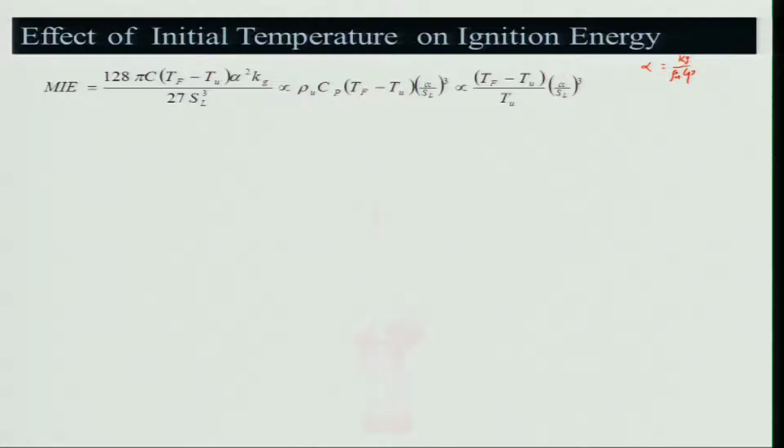So therefore, alpha by SL cubed is more important. Alpha, if you look at what alpha is, it is basically K or Kg divided by rho u Cp. Temperature also comes into picture here. So if you look at SL, it is also a function of temperature, so it will be more towards this quantity.

Stoichiometric, it will be minimum, and as you go towards the lean mixture, ignition energy requirement will be higher because losses will be higher, and burning velocity is lower. The more correct statement would be that burning velocity is lower in the lean and rich mixtures as you go from stoichiometric, and therefore ignition energy requirement will be higher.

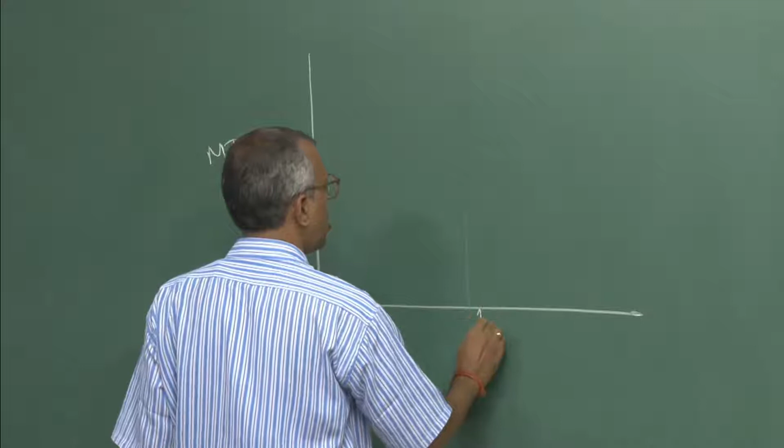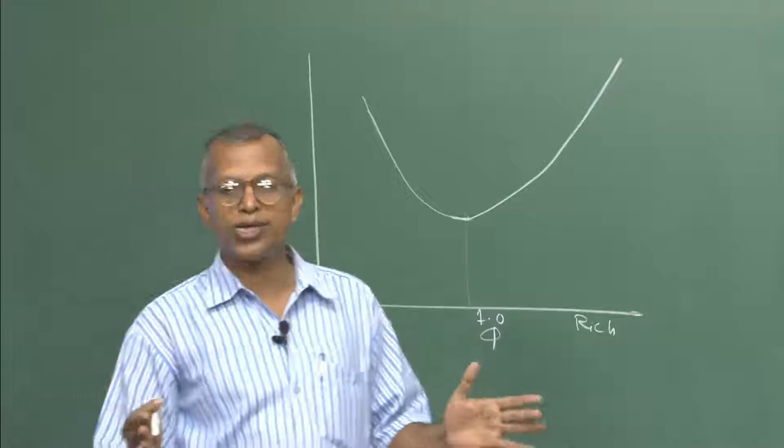That means, if I look at ignition energy versus equivalence ratio for a particular fuel air mixture and system, this will be the minimum ignition energy, around 1, with the lean side meaning fuel lean, and the rich side. This is the minimum, and it goes on increasing depending on how close it is towards the limit mixtures, the lean limit and rich limit.

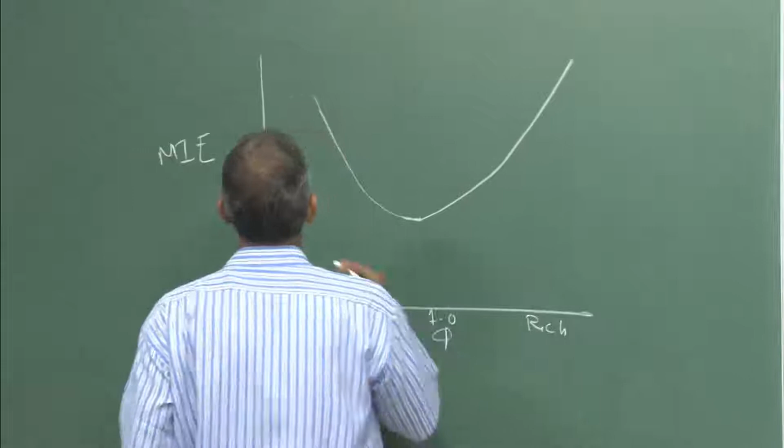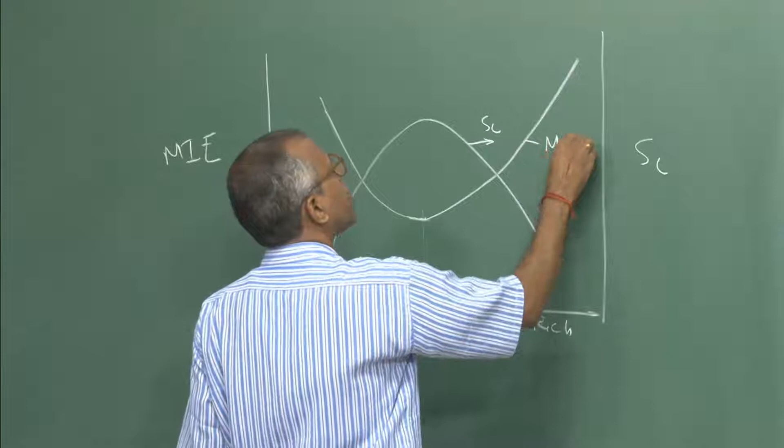Because if you look at this, it can be related to the burning velocity. If I plot SL over here, this is SL and this is MIE. So you should keep this in mind, but here I am looking at the inlet temperature kind of things.

What you could see is that for N heptane, I have given some initial temperatures in the next column: 289, 373 and 444. If you look at ignition energy for 289 it is 14.5, for 373 it is 6.7, and for 444 Kelvin it is 3.2 — that is N heptane, as opposed to isoheptane. For N pentane, I have given data at 298, 373, 444 with values 7.8, 4.2, 2.3, also decreasing with increase in temperature, and so also propane air is also decreasing.

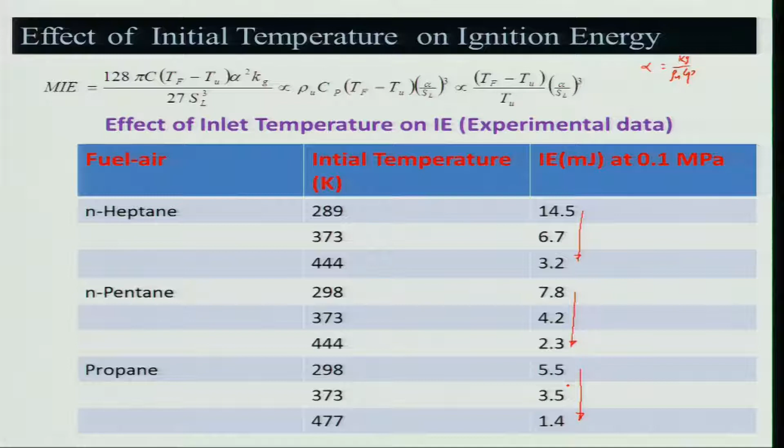Apart from this, can you observe any other thing in this table data? I have talked about with the increase in temperature it is decreasing because SL will be increasing, right. So the ignition energy will be decreasing, it is expected from this relationship. Or if you do not want to feel comfortable with burning velocity, you can say reactivity will go on, so that you need less amount of ignition energy, right.

But apart from that, can you observe something from this table and tell me? This quality is very essential. Can anybody tell me? Longer chain carbons have more... octane number is less for n-heptane. One can talk about octane number, but other things one can talk about is that there are several bonds that have to be broken. You need to give more amount of energy in a very simple way.

So this is what I am saying, when we are looking at it, observation power is very, very important, not only in science, but for other fields as well. This is something which we are not getting nowadays, which is a concern for most of the educationists, right.

So now we will be looking at another concept which is very important, that is flame stabilization. In other words, how to stabilize a flame in a combustor, and that is one of the greatest challenges for a combustion engineer, to contain the flame, like we contain the anger, right.

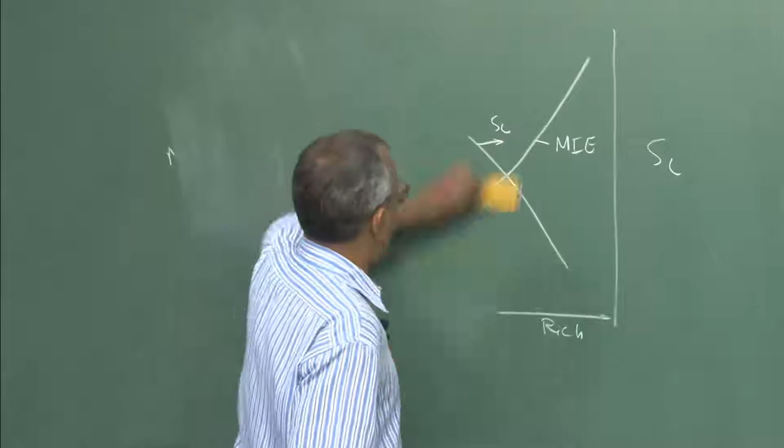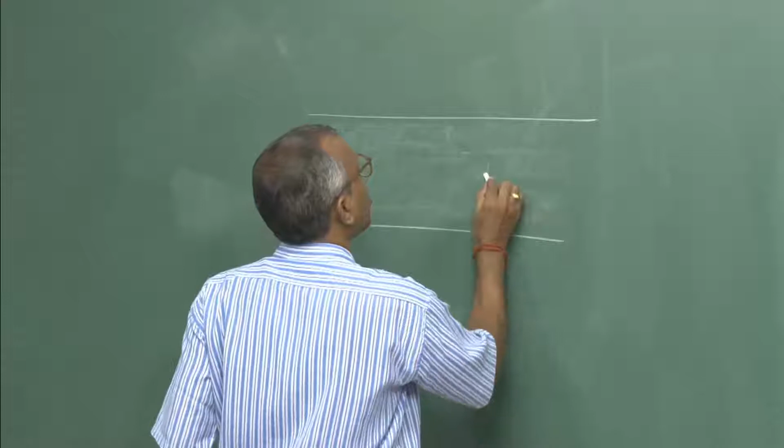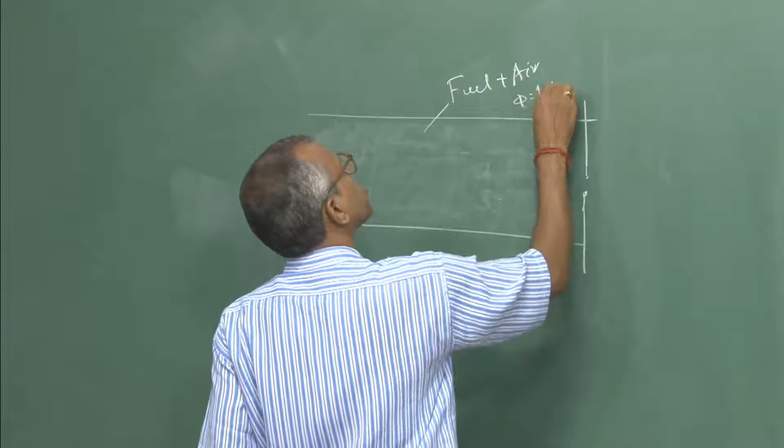For example, if I take this fuel air mixture in a tube, these are fuel air mixture which is mixed well, fuel plus air mixture, and I am igniting here. Keep in mind that this is at phi equal to 1, just for the sake of it, and I will say CH4 air system. Phi is equal to 1, fuel air mixtures are being mixed, I ignite it.

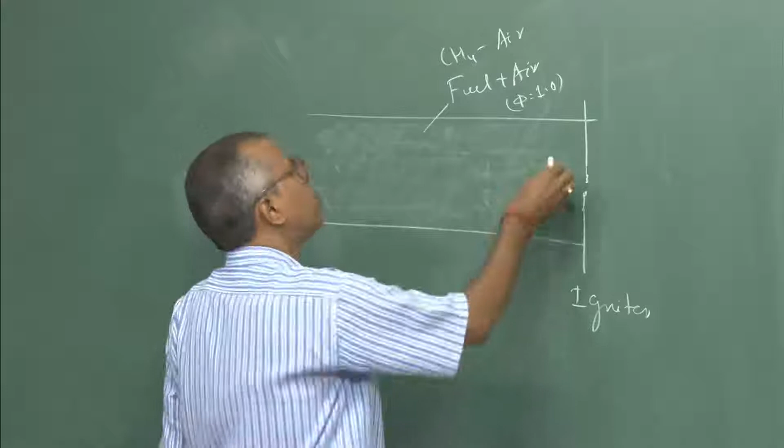That means I am giving some ignition energy. What will happen? The flame definitely will be moving towards this, as long as the fuel air mixture is there, it will go on moving. Of course it will not move beyond that, because there is no fuel air mixture, only air will be there, maybe something might have diffused, but that is not good enough.

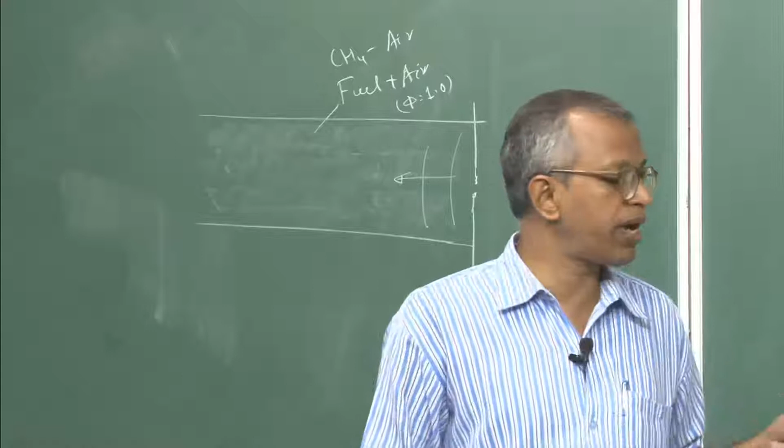Now I want to contain this flame, this is a propagating flame, if it keeps propagating, I will be in deep trouble, but I want to make it stationary. So how will I do that?

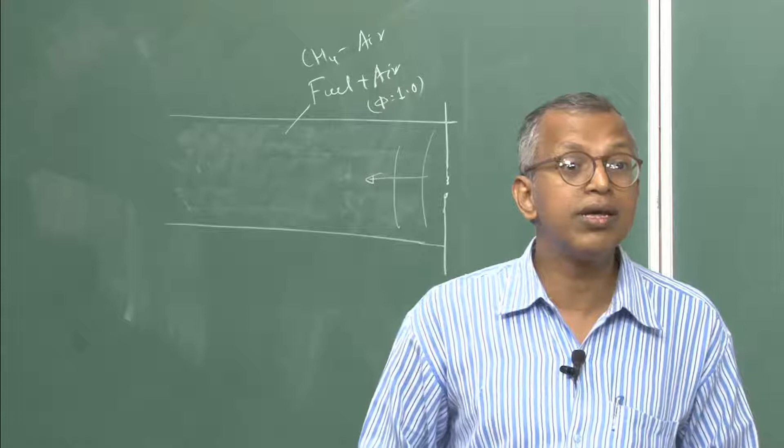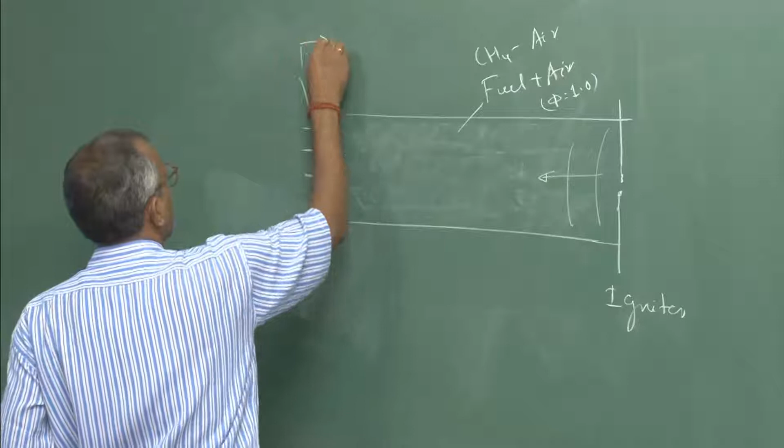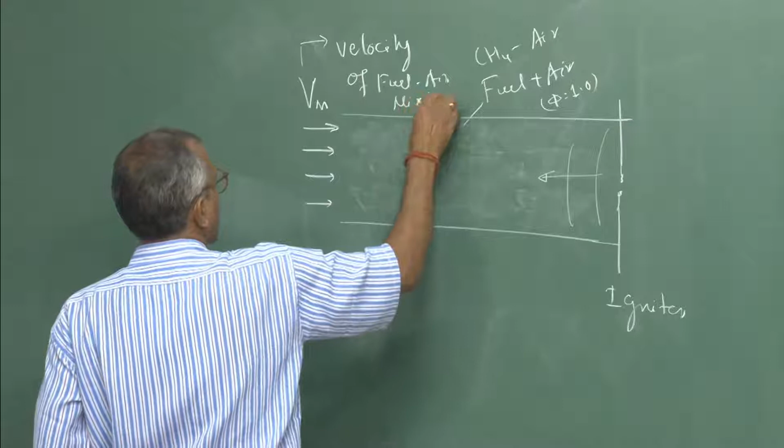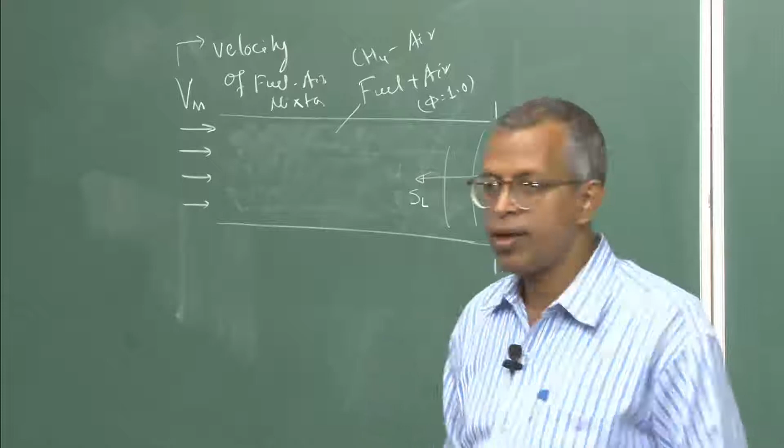That means I need to give this fuel air mixture from here with some velocity, I can say fuel air mixture, this is the velocity of fuel air mixture, Vm. If I give this Vm same as that of SL, the burning velocity with which the flame is moving, then what will happen? The flame will be stationary. The flame can be stationary, let us say it will be stationary here, it is moving at SL when Vm is equal to the same.

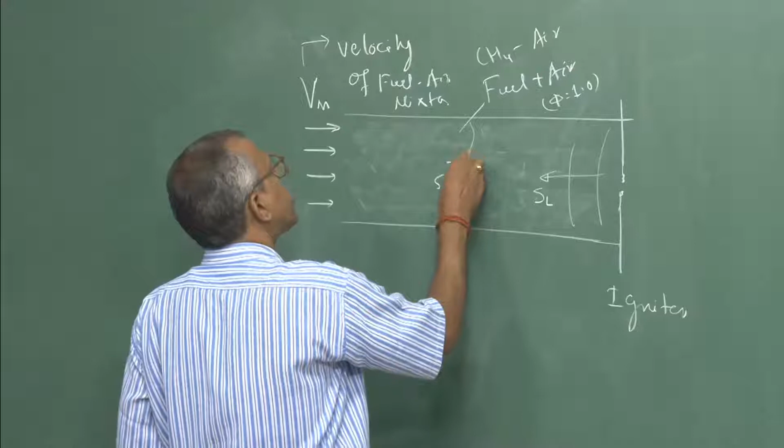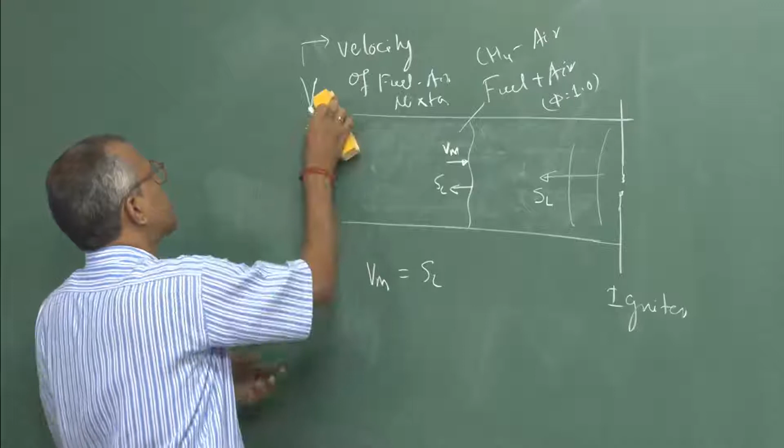Of course this is locally, that means when Vm here, I am talking about local velocities, is equal to SL, do not think this Vm is the same globally, I can say this is V simply, and Vm locally.

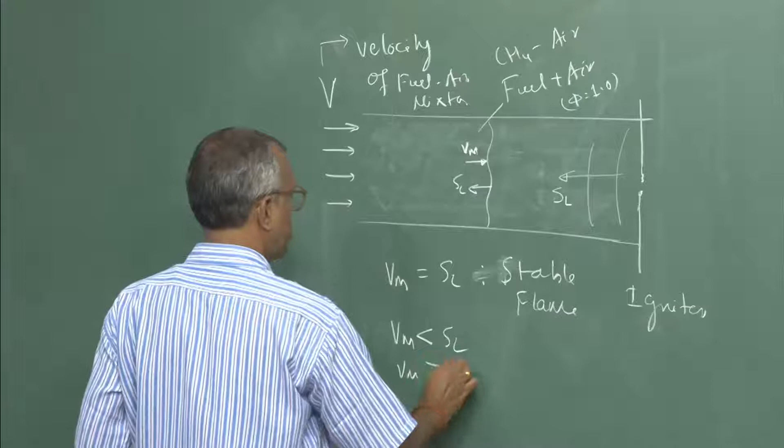Then we get a stable flame, and there might be another situation, Vm less than SL and Vm greater than SL. What will happen? I have already told you that local flow velocity should be equal to the local burning velocity. This is very important, the local point is very important. One is global, other is local. Local means at that point.

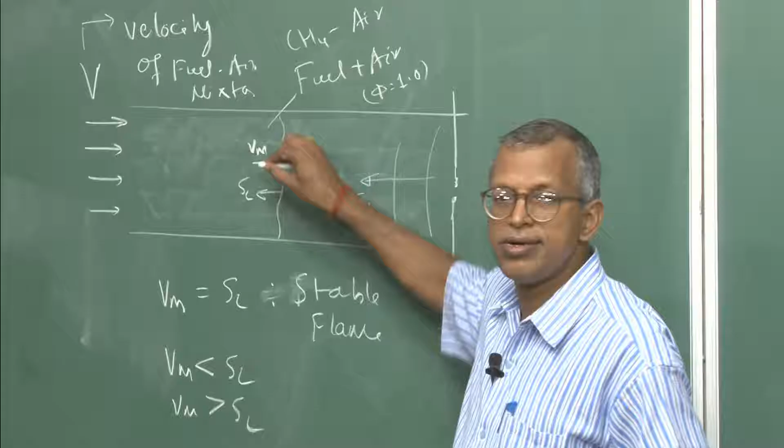Of course the shape of the flame need not be as I have shown, that is why I have drawn a little undulation, just to say that it need not be flat, although we have derived all those burning velocity relationships for one dimension, but flame in nature need not be one dimensional.

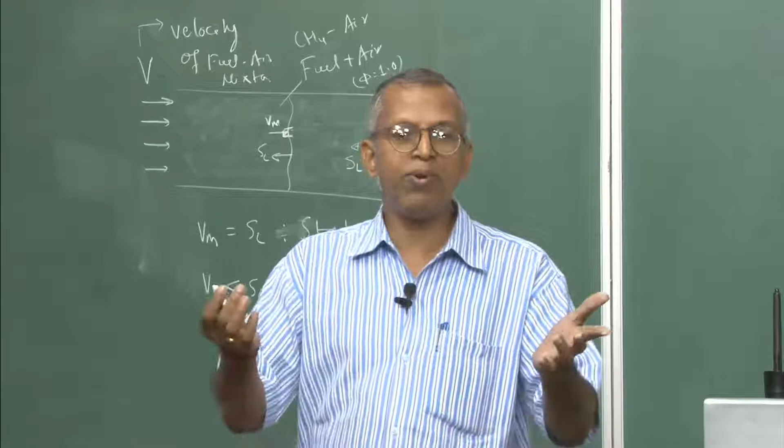When talking about locally, I can consider this as one dimensional. For example, if I consider this one, I can treat it as one dimensional and manage that, right. Is it acceptable or not? The flame may be curved, but similar to how the earth's surface is round, when you look locally at the surface it appears flat.

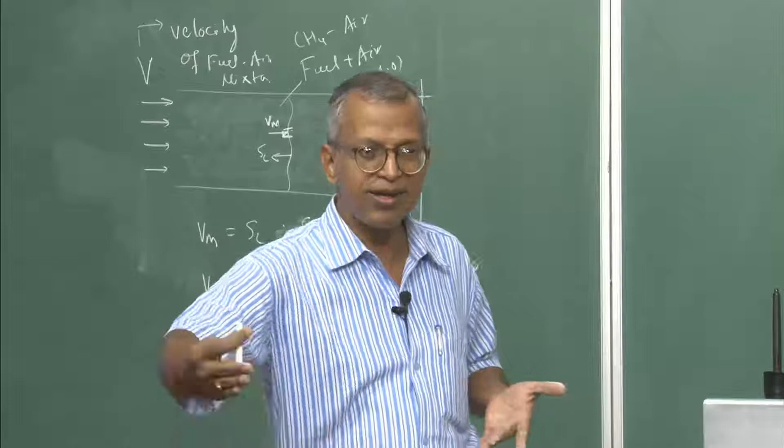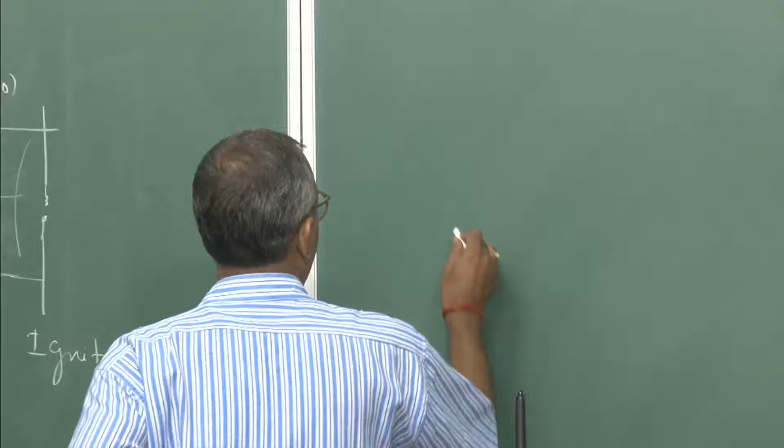So what will happen when there is an increase in gas velocity relative to the burning velocity? For example, I will take this Bunsen flame, this is my Bunsen burner. Fuel plus air, I am taking methane plus air mixture, right.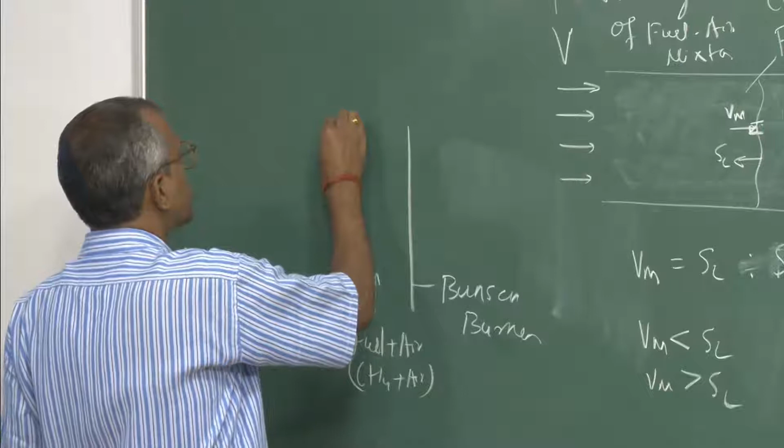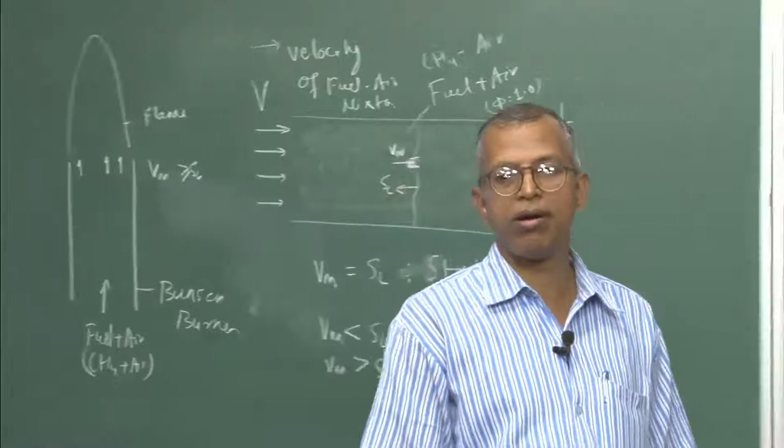If there is a flame, there might be a situation where there is a flame here to start with, but when the velocity of the mixture V_m is greater than or slightly greater than equal to S_L, what will happen? A conical flame will be established, because the streamline through the laminar flame, which I have shown here, will be moving. Why will it be moving this direction? Why in the central line are we going straight? Because after this there will be expansion, and the surface of the flame is curved.

Locally, this is moving at a velocity S_L, and this will be moving at this velocity. So when I look at it locally, if I resolve this component, this is my flame surface. If I resolve this component over here, this is my V, and this is along the flame surface. V tangential and this is V normal, and this flame front is moving with a velocity of S_L. So when V_n is equal to S_L, then only will the flame stabilize at that point. I am talking about this place, right.

That means the tangential velocity with respect to the flame surface will not really affect the stability of the flame. So therefore, at each place it will be different, and it will go on locating wherever the surface is taking it. This is a very important aspect you must understand, and why it is so.

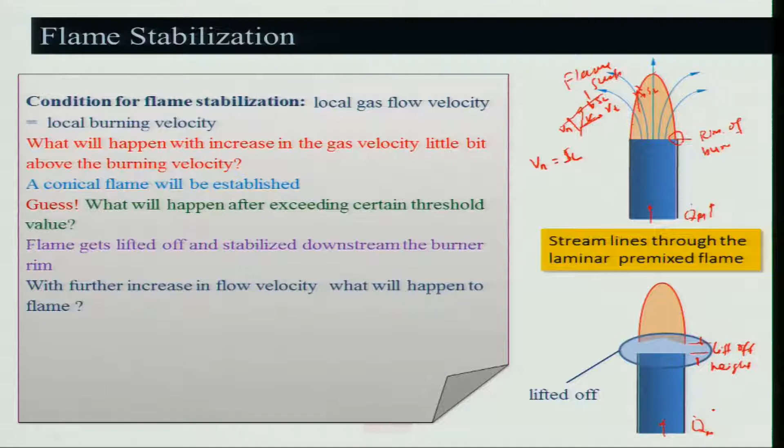That means the flame has left the burner rim and lifted, and as you go on increasing the flow rate further, what will happen? Will further increase in flow velocity affect the flame? Very simple, the flame will again lift more, the lift-off height will increase, goes on increasing, and then the flame will move away from the burner. When it goes away from the burner, this is known as blow off, the flame has gone away.

That is the same thing with our life, right. When we do not have faith in our family relationship, we do not have faith in the heritage, what happens?

We are lifted up, we feel we are independent, but we are not. We go away from that and we are lost in the process of life. This is a very important point, and it is similar to a flame, it is very natural. So, therefore, it is very important to have faith in the heritage, in the relationship, and in spirituality, that is very important.

So also the flame, because that is the nature which has to be accepted. Otherwise you will be blown off, and blown off means it is not of much use, the flame has gone out, what will I do? I do not want anything, that is also another aspect.

If the flow velocity is very low, suppose you started the flame here and you go on reducing this flow velocity, what will happen? The flame will try to enter into it, because the flow velocity is very low and the burning velocity is very high. Then the process, the critical flow rate at which the flame will enter into the tube, is known as flashback. And that is also a similar thing.

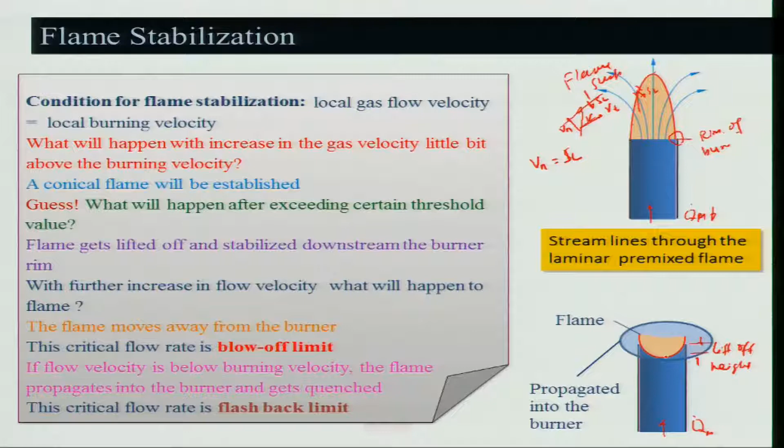If you stick to your heritage, culture and family without thinking, without really finding out what are the flaws with them, superstitious things, then you are also stuck. So what is required is balance. Also the flame, to stabilize, you need a balance, you need understanding where it will be stabilized. So these are very important to know about flame stabilization. I call it life stabilization instead, it is more important in life.

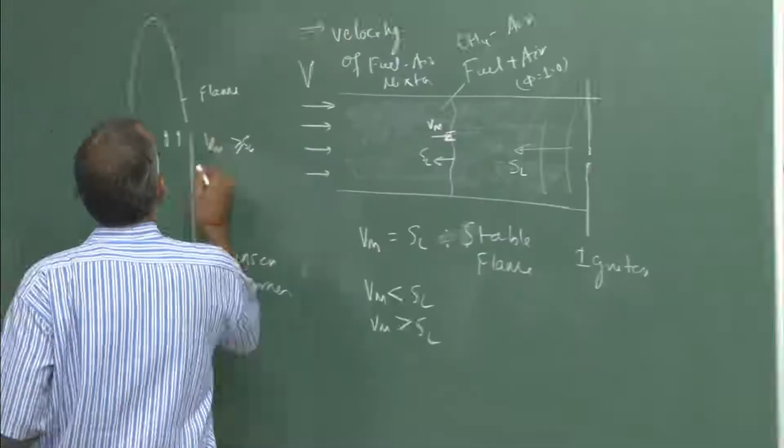Now let us dwell upon this a little further. This is the burner rim. Keep in mind that this is only one portion of the rim I have drawn here, that means on the other side there will also be a rim. For example, if I take this, this is my burner rim, keep in mind this is the rim.

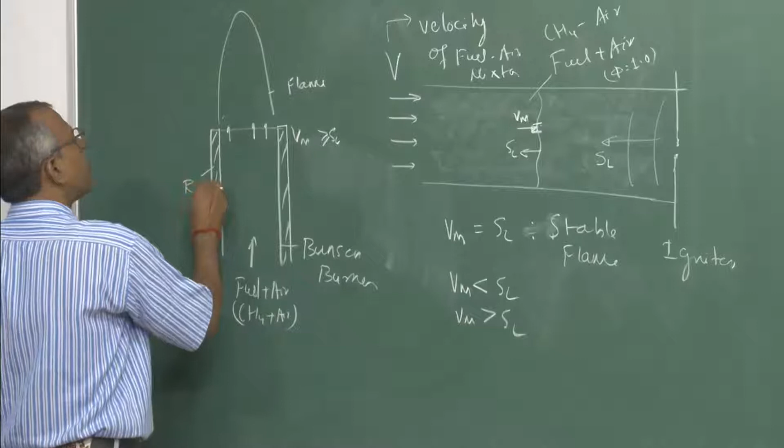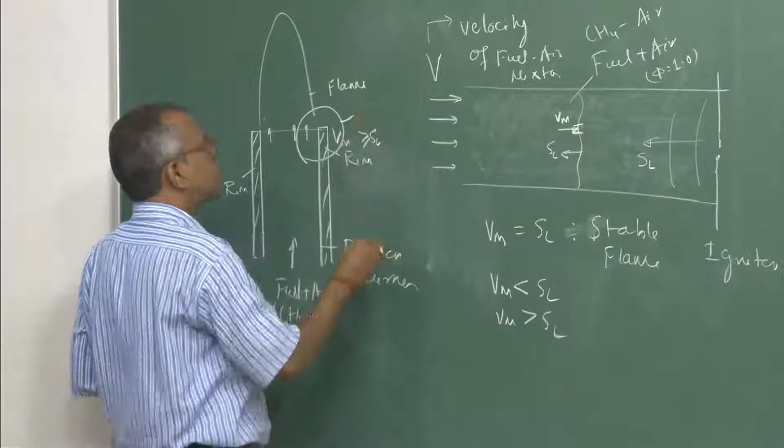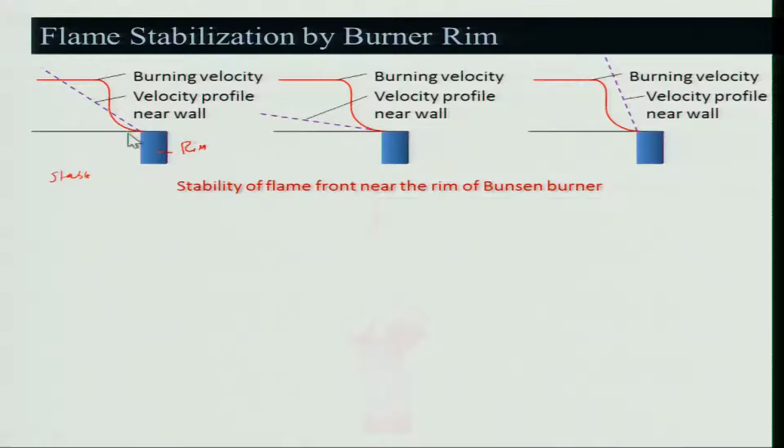So this will be quite stable. Of course, in other regions it is sometimes crossing, that is fine, but we are interested in this region, this is the stable one. That means at the burner rim, flow velocity is almost equal to the burning velocity, and the flame is likely to stabilize here. Also, as I told earlier, heat loss and radical losses at the burner rim are the cause of flame stabilization, but in this case it is good enough to maintain the flame.

And why are we doing this? Because we are basically looking at the gradient, that means how this velocity profile gradient changes along the direction. If I look at this as my r, this is my z, so how it is changing with respect to r, that velocity we need to look at. Laminar, of course we are considering laminar velocity, which can be obtained at a lower Reynolds number.

Whatever we are considering is laminar burning velocity, that is a very important concept, but in a real situation it will not be laminar, it will be turbulent, but a similar argument can be given. When flow velocity Vf is less than the burning velocity SL, then the flame will enter into the burner leading to flashback, and flashback is very dangerous. Why? Because it may lead to explosion, since fuel-air mixture is there, and if it is closed or something is happening, it will be dangerous, it must be avoided.

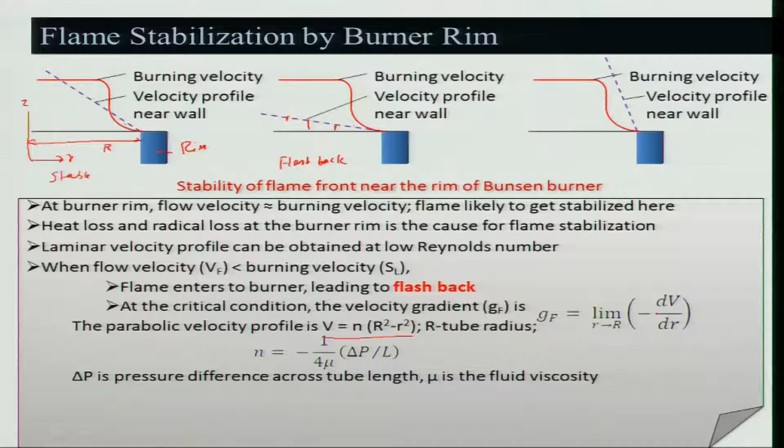If I put these values here and work out the gradient, I find that at flashback, Gf is equal to 8 V average by D. What is V average? V average is basically R square delta P by 8 mu L.

We are doing all this because I considered laminar flow, since the Poiseuille flow equation makes it easier for us to carry out this gradient calculation. In turbulent flow you need to find another way, it is not that easy, which is why I used laminar.

And the blow-off velocity gradient Gb is equal to 8 V average by D. Keep in mind that this velocity gradient in case of flashback will be low compared to blow-off, it will be quite low in flashback as compared to blow-off. That means at a higher velocity flow rate the flame will blow out, but at a smaller flow rate or velocity of the mixture, flashback will occur.

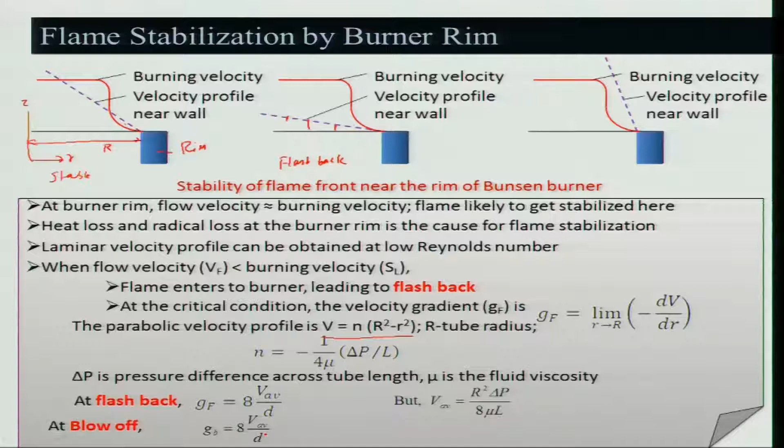So how it is occurring, we will look at. I have taken percentage of fuel on the y-axis and velocity gradient, 1 over second, on the x-axis. If you look at dV by dr in meter per second, it becomes just 1 over second, or second inverse. So what you could see is there are three regions in this: one is flashback, the other is the stable region, and this is blow-off.

That means if I take a particular, let us say 3% of LPG, the rest will be air. If I take this at this gradient, flashback will occur, meaning the flame will move into the tube. If it is lower than this point, but if it is beyond that point, then what will happen? It will be stable. Similarly, going further, it will be at a very higher value, this is your V blow-off and this is your V flashback.

The gradient is more in case of blow-off, and interestingly, what will be the lean region, am I right, less amount of fuel? So this will be lean mixture, this will be rich mixture, and in the rich mixture the operating range is very high, meaning between flashback and blow-off there is quite a higher range. So therefore, other problems will happen, like emissions and other things.

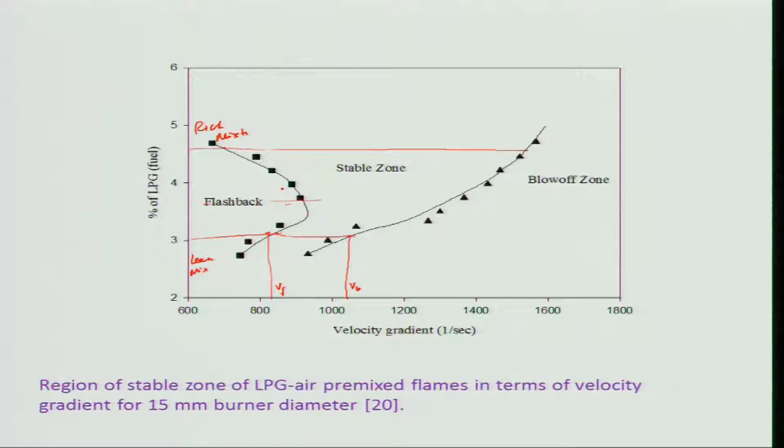But there is a problem. In premix combustion, as is common nowadays in gas turbines, people always try to work on the lean side. But when you work on the lean side, from the emission and energy utilization point of view, you will be in deep trouble with flame instability, which I may not discuss, but that is a very important point.

Now we will move into another class of flame which is more prevalent in both gas turbine combustors and rocket engines: the diffusion flame. I have shown three examples here. One, of course you are very much aware, is a candle flame. Another I have shown here is a droplet flame, and there is a jet diffusion flame, where this is a burner and you just push a certain amount of fuel and you get a flame known as a jet diffusion flame.

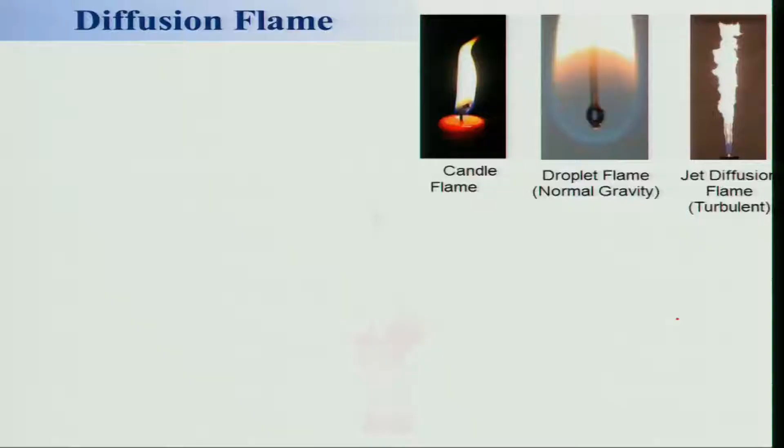These are all diffusion flames. How is this diffusion flame different from the premix flame? In premix flame, at the time of combustion, fuel and air are already well mixed. Here, in diffusion flame, fuel and air are not mixed before combustion takes place. Instead, fuel and oxidizer diffuse, and as soon as they diffuse and mix together, the reaction takes place and combustion occurs. Therefore, this is known as a diffusion flame.

In this case, molecular and turbulent diffusion will be taking place, not only molecular but also turbulent diffusion, and that depends on whether it is a laminar or turbulent flame. For example, this looks to be a turbulent flame because a lot of undulation is there in the flame and it is not very smooth.

We can consider this, but here this will be a kind of droplet combustion, and keep in mind that this is under normal gravity, meaning gravity is present. If it is there, then what will be the flame shape? The flame shape will be like this. Of course, there is a blue region, there is a yellow region, all those things.

And there is a candle flame, which shows a very nice shape. Although its shape changes a little bit, it is quite smooth as compared to the jet diffusion flame. There is a corrugated shape in the jet diffusion flame, whereas the candle flame is very smooth.

So one can consider it to be laminar, but when you really use a high speed camera and look at it, it need not be laminar as it looks to be to the naked eye, and sometimes it will be oscillating. Some people have studied this and found it is in a transition region.

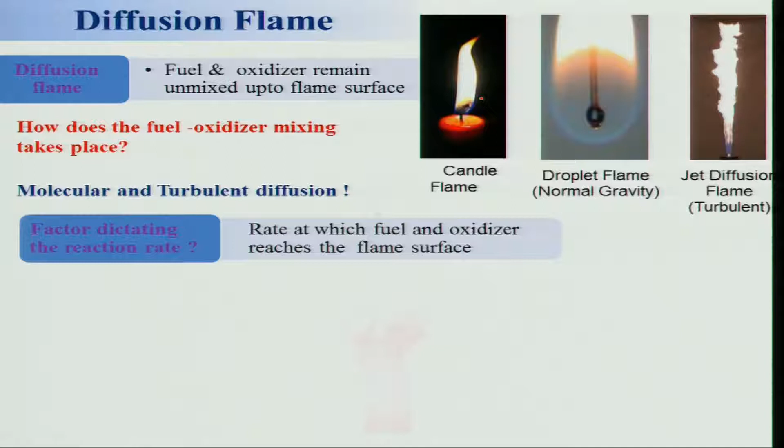In the case of diffusion flame, the kinetics is very fast, so it is really not dependent on kinetics, because as soon as the fuel and air mixture mixes together, reaction takes place. So which time is governing the flame to occur? It is the diffusion time. The rate at which fuel and oxygen reach the flame surface governs the reaction rate, and therefore this is known as diffusion controlled or diffusion limited flame. Let me repeat: premix flame is kinetically controlled, and diffusion flame is diffusion controlled.

So what are the examples of diffusion flame? I have already shown you, but in the practical situation what would it be?

Forest fire is one example of a natural diffusion flame, and of course the jet diffusion flame is man made, but we do use it in several applications.

Jet diffusion flame, or the jet flame rather, can be premixed. Where do you use jet premixed flame in your day to day life? What happens to your burner in your cooking stove? Those are also multi-jet flames. And in gas welding, do you premix, or do you use a diffusion one?

So there is candle flame and liquid fuel combustion, which are basically combustors, and solid fuel combustion, where we do use diffusion flame. So what we will be talking about, we will be basically interested in liquid fuel combustion, and solid fuel combustion I will be talking about when we discuss rocket engines and other processes.

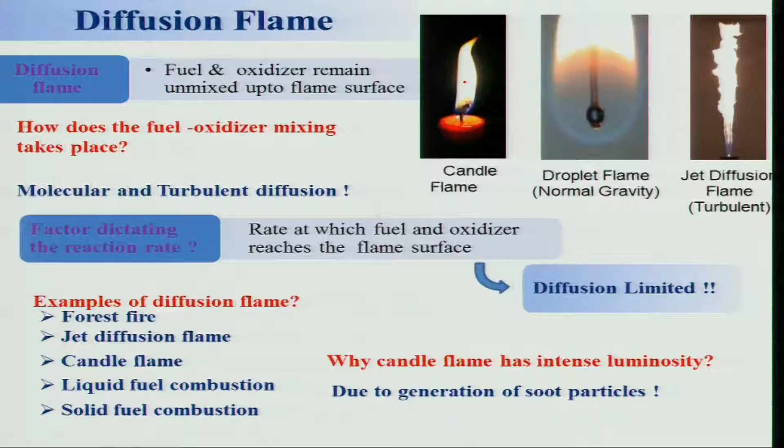So another question comes to my mind: why does candle flame have intense luminosity? It is yellow, of course a small portion is blue, but it is mostly yellow. The answer is very simple: it will be having a lot of soot particles, and that gives this color. So it is not really good for health, as soot is not good for health, but we have been using it since time immemorial.

So how do we establish a diffusion flame, or rather a jet diffusion flame? It is very simple, like we can use a Bunsen burner with the vent closed. You remember there is a vent in the Bunsen burner. If we close it, it becomes a diffusion flame, or use two concentric streams of fuel and air, or a simple jet. You take a tube like this and put some fuel only, and even with ambient atmosphere air it will burn. So there are several ways, and we will be looking at the physical description of a simple jet flame.

If you look at methane in this tube, it can be a pipe or 2D. And if you look at this jet, we have a potential core, in which the velocity at the inlet will not be changing. For example, if I take a cross section at this dash line, the velocity is Vz until this r, and when r is equal to capital R or beyond, it will be 0. This is the ambient air, and the temperature is uniform here, same as that of the ambient, T infinity.

Now, there will be a mixing zone, shown here in the line. When the fuel and air mix together, combustion occurs and the flame will be forming.

This height from A to the B cross section, A to B, we call the core height, and this HF we call the flame height. The flame tip is here, and please note that flame height is an important parameter for a jet diffusion flame.

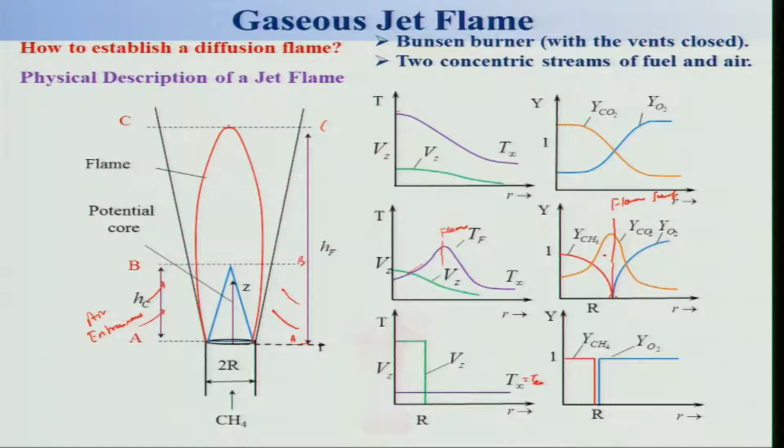So with this I will stop. In the next class, we will look at this phenomena of the jet flame and derive a relationship for the flame length. Then I will be moving into droplet combustion. Okay.